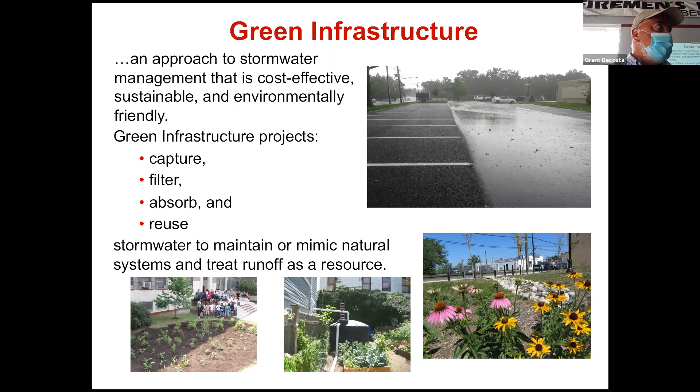So green infrastructure is what we're talking about today. It's really an approach for stormwater management where we're trying to mimic the natural water cycle. We're trying to capture stormwater near its source, infiltrate that water or absorb that water, and at times reuse the water. So we actually have some ways we capture the water and then reuse it in systems.

So this is the natural water cycle. We teach this in school throughout the country, usually in 3rd or 4th grade. We talk about how the snow melts from the mountaintops and comes down along the prairies where the buffalo roam, and water is recycled. You know, we can't create or destroy water. It's the same water that the kids are drinking now that the dinosaurs peed in millions of years ago. So the kids get a kick out of that.

But this isn't really our water cycle anymore, because we've added all these impervious surfaces. As we add more development, we get more stormwater runoff. A natural forested condition is about 10% runoff. Single family homes on half-acre lots give you about 20% runoff. More densely populated homes on quarter-acre lots give about 30% runoff. Downtown areas with buildings, like in Philadelphia or even smaller towns, give about 55% runoff. So as engineers, the idea is to make those 20, 30, and 55% runoffs look like 10% — we're trying to capture that water and put it back into the ground.

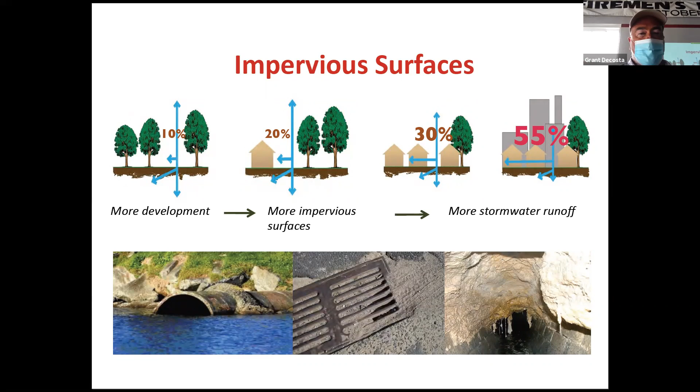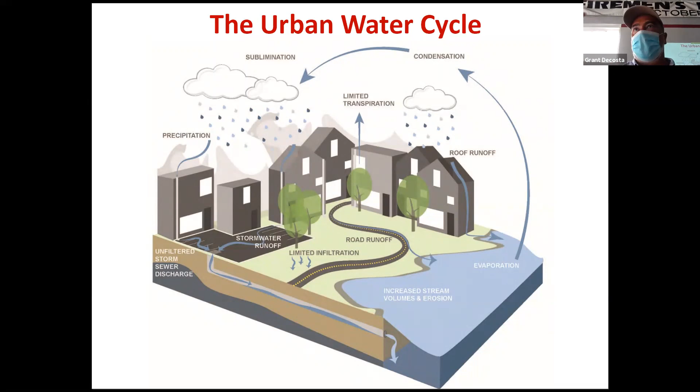So in effect, we've created this urban water cycle. There's much less infiltration, much more runoff. There's also less evapotranspiration — less evaporation and transpiration from trees and plants — because there are fewer trees and plants giving water back into the atmosphere. So we try to use green infrastructure to restore that water cycle.

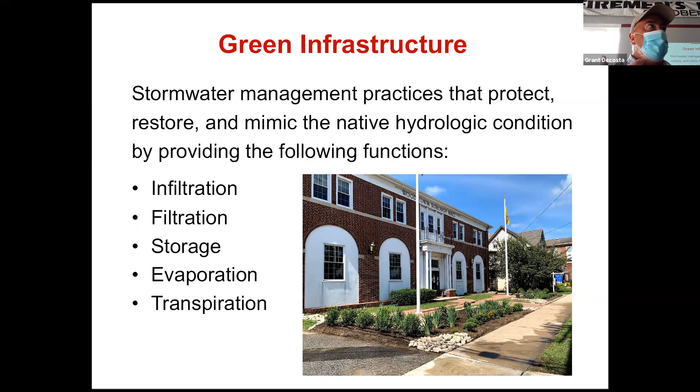All green infrastructure practices have some of these components — some have all of them, some only have a few. They infiltrate, they filter water, they store water, they enhance evaporation, and they enhance transpiration. That's what we're trying to do. These are the practices we're going to talk about today, and I'll talk a little later about how to design some of these practices.

So the first is a bioretention system. Bioretention is a long word, which we hate using because the public doesn't really understand it. Engineers and scientists love it, but when I go into a community and tell a mayor — who maybe is an accountant or a lawyer — that I want to put a bioretention system in front of his library, he looks at me like I'm crazy. But when I tell him, no, we're going to put a rain garden in front of your library, then they say, oh, that sounds nice. So there are different types of bioretention systems — the rain garden is one of them.

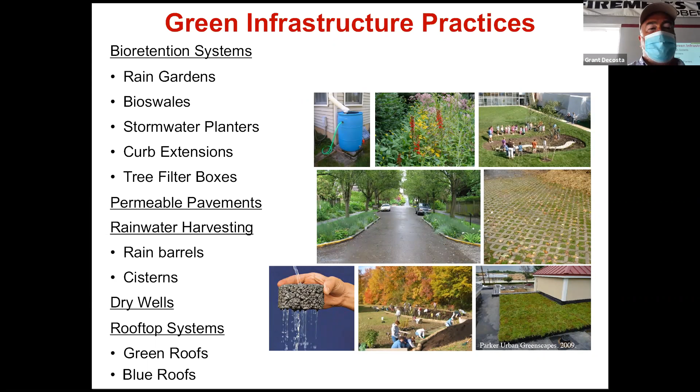Okay, so the rain garden is one of them. Bioswales is another, stormwater planters, curb extensions, tree filter boxes. We're also going to talk about permeable pavements, rainwater harvesting, dry wells, and rooftop systems.

So these are the types of bioretention systems. The bioretention cell or the rain garden is the one that we most think about. The other system is more of a swale, which is a nice word for ditch, as I tell everybody. So we call them bioswales - bio means life, so it's a ditch with plants in it, basically. It's designed to filter and infiltrate water.

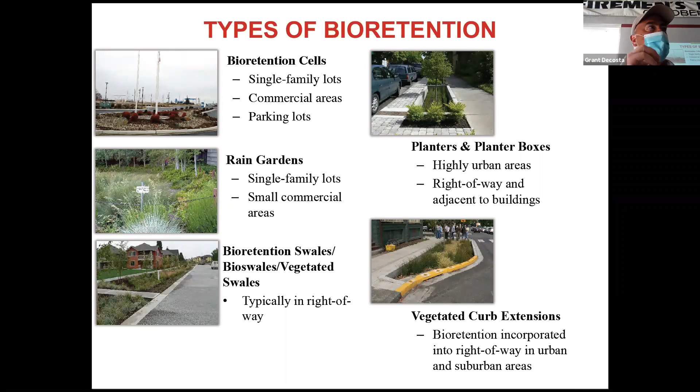We also have on the right-hand side of the slide stormwater planters and planter boxes, which are really built into the sidewalk area. They're very much structured systems, but they still behave like bioretention, capturing the water and letting it back into the ground. Then you have curb extensions, which is a little different because now we're extending the sidewalk out into the roadway. We're taking up a parking spot and harvesting rainwater there with a bioretention system.

What's nice about that is it also slows down traffic and can protect pedestrians when they're crossing the road. You see a lot of these near intersections where people aren't supposed to park anyway. The idea is these will allow drivers to see with an unobstructed view who's coming, so people won't get hit as they cross the road.

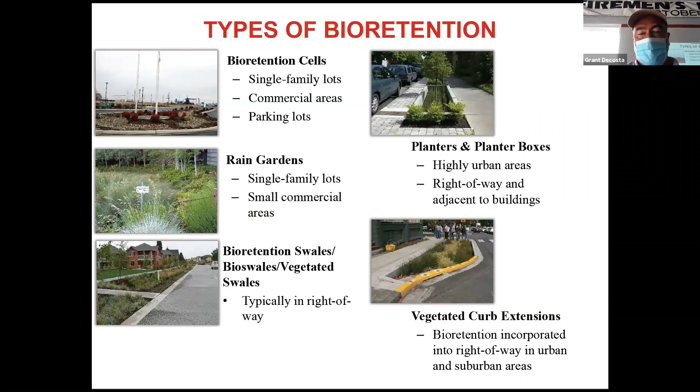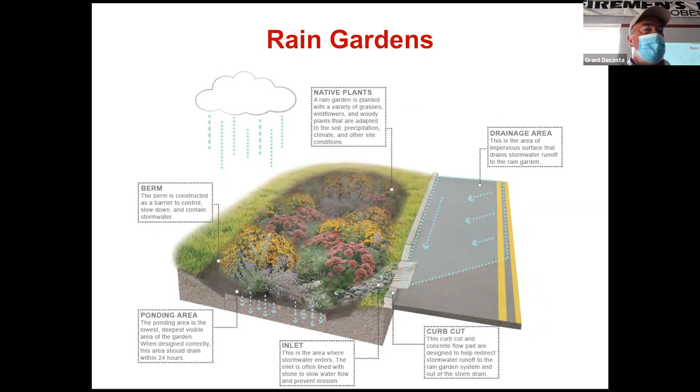So rain gardens are what we're really going to focus on today. This is an example of one - basically a shallow landscape depression. The idea is that stormwater goes into here, fills up uniformly like a bathtub, and slowly percolates into the ground. When you get excess water, it overflows into a direction that we identify, or it overflows into a system that takes it out under the garden.

So it's really nice. I'm not sure why it keeps doing that, but let's see - okay, there we go. If it goes out, just let me know in case I can't see behind me.

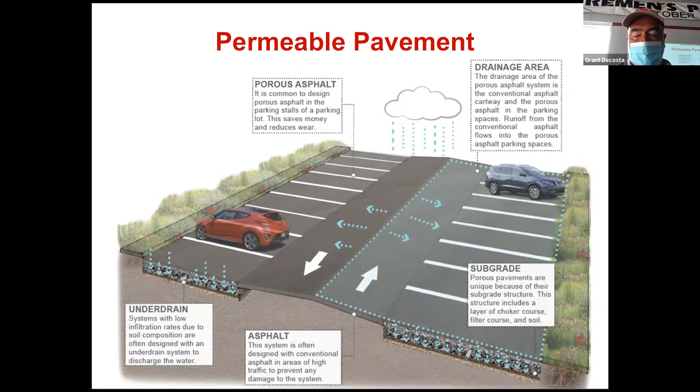So now we went back to the original idea. Let's go back to that coarse material, but instead of letting the water sit just underneath the asphalt, let's give it a place to go. We put a stone layer underneath, as you can see in this picture. The water goes into the stone and slowly percolates into the ground as it passes through the asphalt.

This asphalt is a little softer because it doesn't have the fine material, so we mostly just use it for parking spaces. When we do a parking lot or very low-traffic roads, you can drive trucks on it, but it's not recommended on a regular basis.

We have a couple different types of permeable pavement. There's porous asphalt, shown here—you can see the cartway where cars drive is regular asphalt, which is wet, and the parking spots are porous, which stays dry. The cartway water flows onto the parking spots, goes into the stone, and seeps into the ground underneath. It's a great system for storing stormwater.

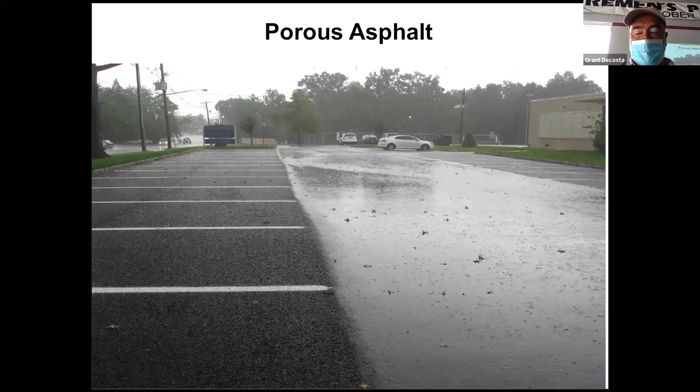We also have pervious concrete—same concept, no fine material, so water passes right through. And we have permeable pavers, which are really nice; water passes between the cracks, same stone layer underneath, but these are very expensive. That's the problem with pavers.

If you're changing out a concrete sidewalk for pavers, it's going to cost a lot of money. Porous asphalt costs exactly the same as regular asphalt, about $2 to $4 a square foot. The added expense comes from digging down and putting that stone layer underneath—that's what costs the extra money.

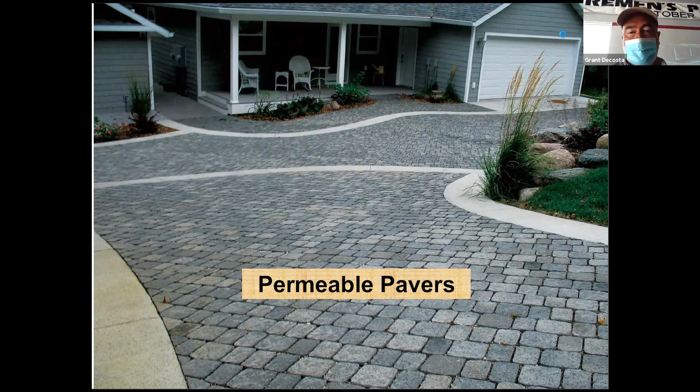We also have grass pavers, which we use a lot in overflow parking. Grass grows up through these concrete blocks, with a stone layer underneath, and water goes right through into the ground. The other thing we do with green infrastructure is harvest rainwater.

We happen to be here at a firehouse, and I know firehouses spend a lot of time washing their fire trucks using potable water to do that. We talk a lot with firehouses about putting a tank in so we can harvest rainwater and use that to wash the fire trucks. Rainwater actually has a different hardness, so it doesn't spot up as much, so you get a nicer wash on your truck.

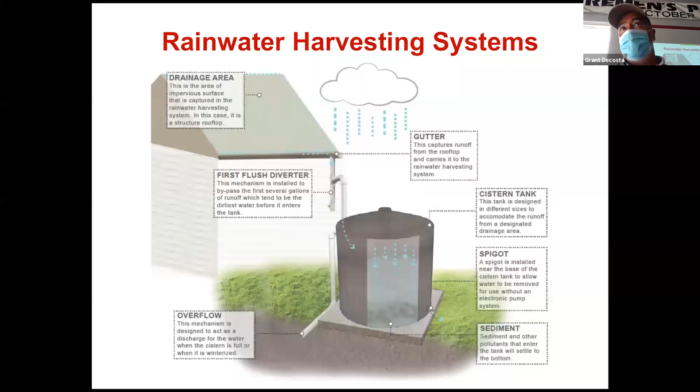So the idea is we're harvesting rainwater. We have lots of different systems, and individual homeowners put these barrels in. Now, these barrels don't do much for stormwater management, they only capture the first 55 gallons of water, so you're really not going to solve any flooding problems with this, but you are going to build some environmental stewardship.

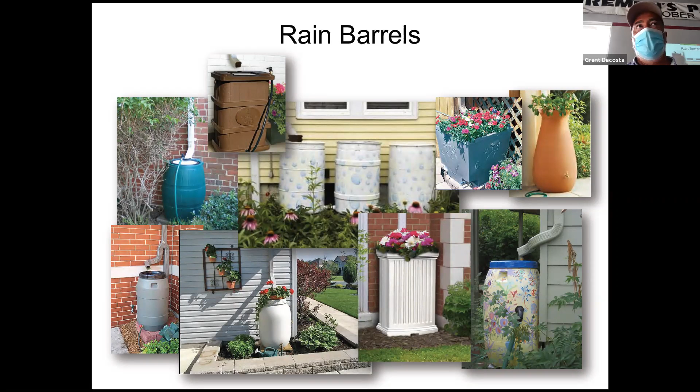This is a great way to get homeowners excited about doing something to save the planet. First, we convince them to put a rain barrel in. Next, we convince them to put a rain garden in. Next thing you know, they're trying to put a green roof on their house. So we refer to the rain barrel as the gateway drug to stormwater management. That's what we use it for, as an educational tool. But these systems are actually very effective.

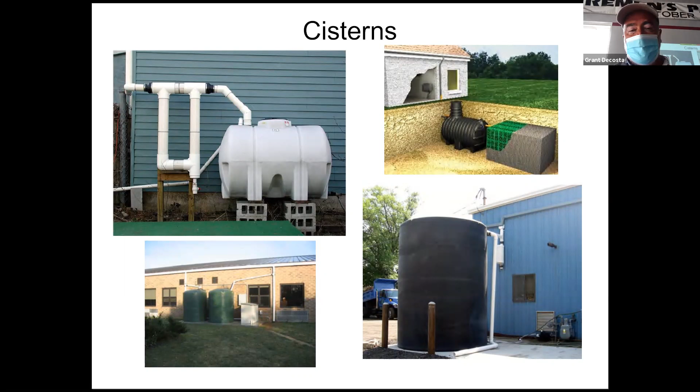Here's one we had built at a community garden. What's nice when you build these at community gardens on vacant lots is when they sell the vacant lot, you can just go and pick up the cistern and take it to another lot. It's easy, they're plastic, they're transportable, they're not a big deal.

This is one that slips right against the wall, which is nice because it's only about 21 inches wide. So you can still have walking along the sidewalk and still put this against the wall. This will hold about 530 gallons of water.

These are some that we had built at a community college. What I like about this is they have internal downspouts, so we're able to tap into that and actually bring one into these cisterns to take some stormwater from the rooftop.

The other thing we see a lot of are these dry wells. What's nice about a dry well is it's kind of underground, out of sight. What's also bad about a dry well is it's underground and out of sight, so you can't see if it's not working. You can see if a rain garden's not working, has problems, has too much water in it, not draining properly. This is basically a plastic container underground with stone around it, fills with water, and slowly infiltrates into the ground.

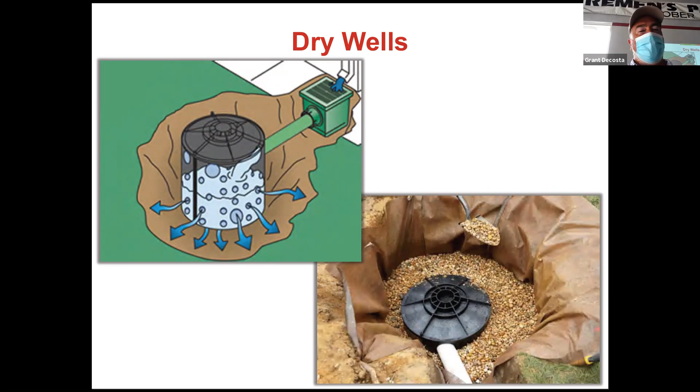The other thing we look at are these rooftop practices. There's two types we think about: green roofs and blue roofs. I'm sure you've seen a presentation of Philadelphia talking about their green infrastructure program. They always show all the roofs in Philadelphia, and they click a button and they all turn into these beautiful green roofs, and everybody in the audience goes ooh, ah, like they're watching fireworks. And all the engineers in the audience say, wait a minute, that's got to be heavy. You can't put a green roof on an existing building without shoring up the structure, and they would be right.

In most cases, a green roof weighs between 15 to 35 pounds per square foot. Most roofs can handle that extra weight because it's designed to handle snow load. But if you put a green roof on a building and get 3 feet of snow, there's a good chance the green roof and the snow will be in your lap. So you have to be very careful and make sure the structure can actually hold up that roof. This is great for new construction, and we highly recommend it.

What's nice about a green roof is it provides an extra layer of insulation, so it helps with heating and cooling bills. It also lasts a long time. The typical flat roof has a rubber membrane that we tar over, and every 5 to 7 years we have to redo it because it starts to crack and leak. A green roof will last 25 to 30 years without any additional work—you just have to take care of the plants.

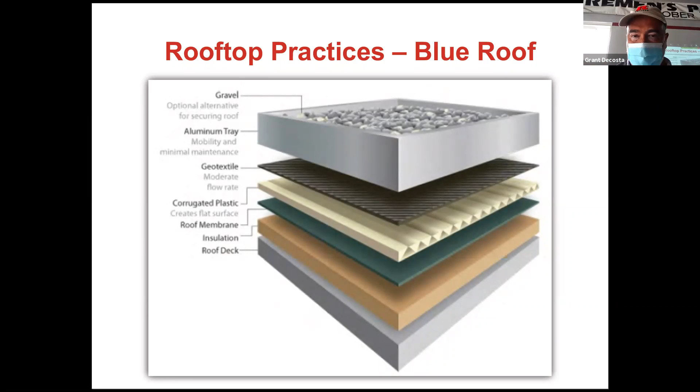So next is... there we go. Grant, you're up. Do I take questions now or later? How does this work? Any questions? Excellent. Good, thank you. No? Good. Yes, sir.

So the cistern—the typical cost is about $2 a gallon, installed. The problem is you also have to pour a concrete pad to put it on because it's a lot of weight, or have a really strong stone base. And if you want a pumping system, you have to redo the gutters. It could be as much as $3 or $4 a gallon when you add all the other things on. They're very inexpensive, but they only work 9 months a year, because you have to drain them in winter or they become a big ice cube. And that's bad.

Yeah, that was Clark, New Jersey. Yeah, so, yes. Yeah.

With both blue roofs and green roofs, you're only storing about a half inch of water typically, because water is very heavy. So you don't get a lot of storage. In a green roof, we say we're going to store a half inch of water in the soil. Blue roof, we may get a bit more since we don't have soil weight, so maybe up to 1 inch. But when I build a rain garden to handle stormwater, I can design it to handle 3 to 4 inches of rain. So it's all about how much water you're trying to manage.

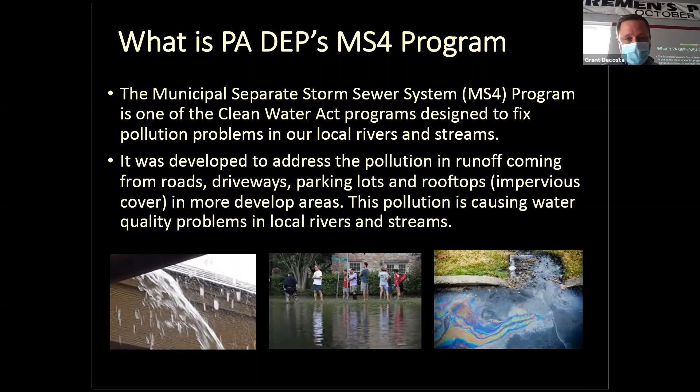The MS4 program in Pennsylvania is managed by the Pennsylvania Department of Environmental Protection. It's a component of the Clean Water Act. Really the first phase of the Clean Water Act was to address those point sources - that's the end of the pipe. So these are things that are in the built environment. There are other types of non-point source pollution, such as what we see off of agricultural operations, but this is to handle that urban load that's coming when it rains off of our built environment.

As I mentioned, the Clean Water Act was really effective in addressing all of these point source problems in our built environment that's coming out. There's still more to be done, such as addressing combined sewer overflows, which are still happening in a lot of our large cities, but that's another problem, fortunately, we do not have in this watershed.

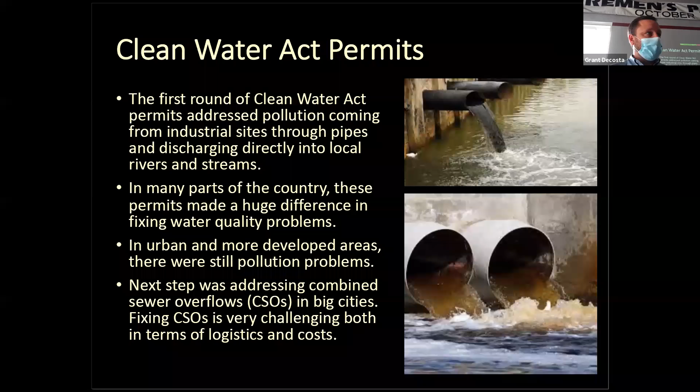So the MS4 program, as DEP monitors it, is a permitted program. Every 5 years, municipalities that have a certain urbanized area or density have to get these permits. We just had our permit cycle come up, the new session started in 2017. The next one will actually be in 2023. Right now the DEP is working on updating that, and there are changes to the program during each permit cycle.

Where are these MS4 communities in Pennsylvania? All the colored places are where you see them, with obviously the largest areas around our more dense population centers in Pennsylvania.

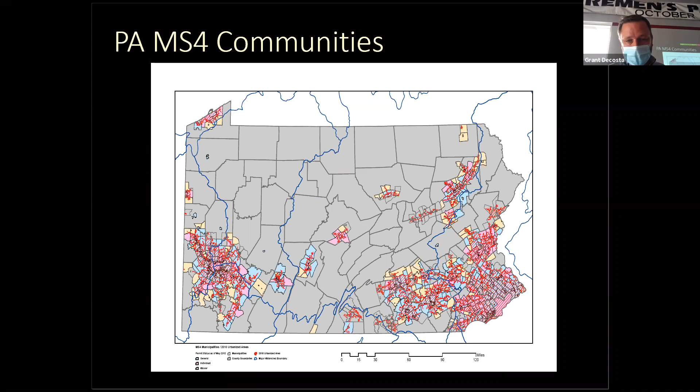So what is included in an MS4 permit? Really there are 6 minimum control measures that all permittees must meet: public education and outreach on stormwater impacts, and public involvement and participation. A lot of the benefits that members of the CWMP get are through programs like this, and the different members do stuff like stream cleanups that can certainly count and help for you.

We also have our annual advertising that goes out, and all the members pay in. BRC, Brian Winslow, manages that program, and that counts for your annual reporting, which is due this time of year.

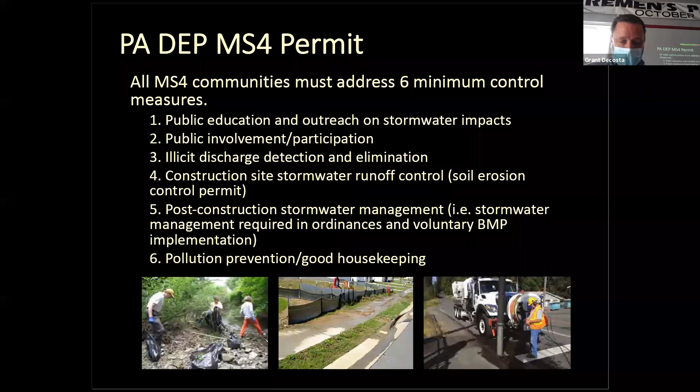Illicit discharge detection and elimination, that's what a lot of the public works crew, many of you in the room, do as part of your permit and reporting. Construction site stormwater runoff controls, post-construction stormwater management, those are typically when things are happening that are disturbing. And then finally, pollution prevention and good housekeeping. It really is the paperwork side of things.

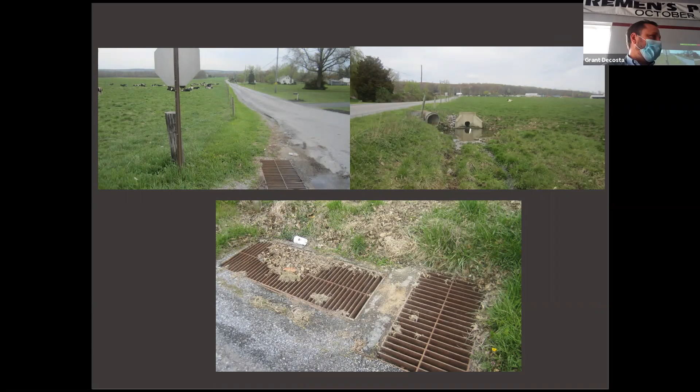But this is another view of the farm. You see the drop boxes here, which directly discharge to the pipes you see on outlets in the upper right. This farmer had 9 of these along his roadway. In addition to his own impairments, allowing us to put in that buffer is helping address the urban impact as well—otherwise, if you went out and just sampled his stream without knowing this, you would think all of those pollutants are coming off his operation. So how can we help?

This is the collective we here—CWMP, the members here today presenting to you. First is funding, money. A lot of us are 501c3 nonprofit or other types of non-governmental organizations. We can apply for funding that municipalities may not be able to, and we can help install those. Sometimes it's in-kind with technical assistance, sometimes it's direct payments. We do have some of these programs going on now where we're helping municipalities fund their MS4 program and the BMPs that need to be installed.

Technical assistance, as we're hearing about today from groups like Christopher Obropta and Rutgers Cooperative Extension, can help both with design and implementation. We can also help with some of the behind-the-scenes stuff with getting your permit approved. And finally, project implementation—once again, that's the built stuff we're looking at.

We're fortunate here that on the money side, the William Penn Foundation out of Philadelphia has launched a Delaware River Watershed Initiative. This is a 10-year program to achieve measurable water quality results over that period. One of the cluster areas they've identified within the Delaware River Watershed is the Brandywine Christina. This gives my group and others a lot of funding to help support staff time. They're also making capital funding investments in groups like the National Fish and Wildlife Foundation, one of those financial sources we can apply to for funding to help you all meet your project needs.

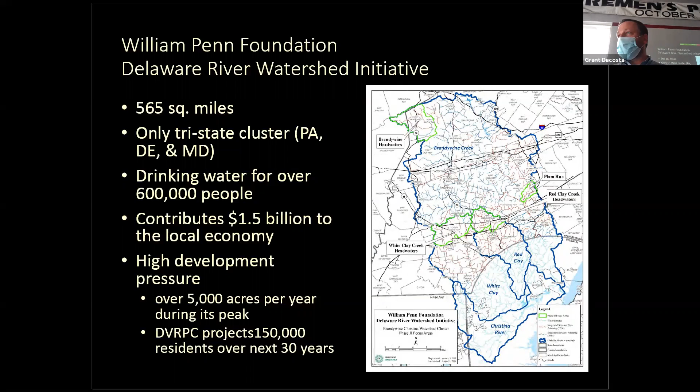Why is that important here? As we know, Chester County is blessed with a lot of great resources, but it's in a highly developing area. Recently the Delaware Valley Regional Planning Commission estimated we're going to have 150,000 new people in Chester County over the next 30 years—that's 50,000 people per decade. So we're anticipating more urbanized area, more stormwater runoff, and a larger responsibility for municipalities to meet their MS4 requirements.

Another way we can help with funding: Shane Morgan with the White Clay Wild and Scenic has the Catch the Rain program. As we apply for funding, this is another source that both municipalities and, more importantly, landowners can apply to. Landowners can potentially be part of your MS4 solution.

Technical assistance is another way we help, including on intergovernmental agreements. This is some of the behind-the-scenes work for implementing your MS4 program. Recently, through the CWMP, we helped Honeybrook Borough and Honeybrook Township develop a joint MS4, allowing them to partner together to meet stormwater needs in a cost-effective manner. To get this approved by DEP, some important behind-the-scenes components need to happen, one of which is an intergovernmental agreement. Part of that had to identify how projects would be proposed, managed, and funded. What made sense for them was a cost share program where the borough covers the majority of the investment need.

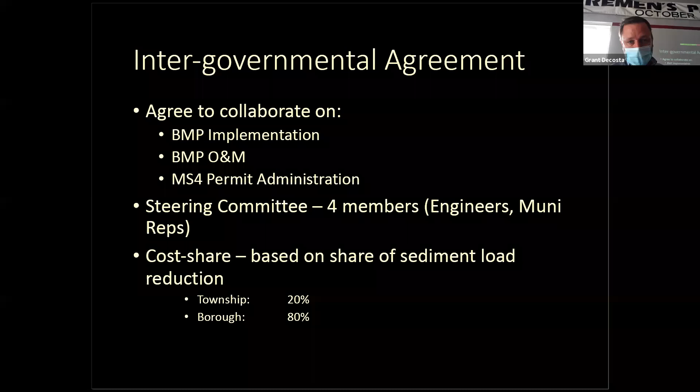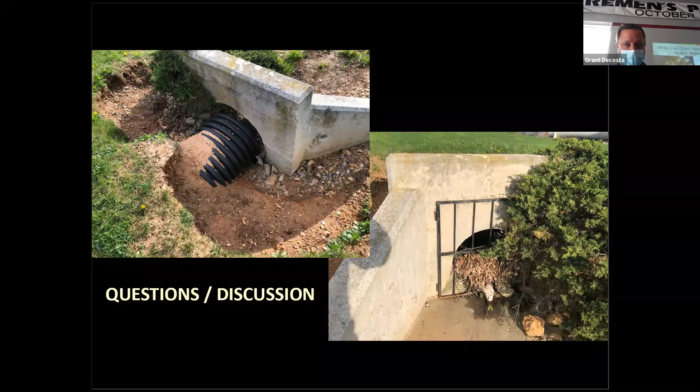Are there any questions now from the audience or via the chat? Nope. Thank you. Now we'll turn it over to Shane.

Good morning, everyone. I'm Shane Morgan with the White Clay Watershed Association, and I'm going to talk a little bit more about the West Grove project and how we came about selecting it.

But first, I wanted to give a little background on the White Clay Wild and Scenic River, for those of you with townships here. I'm trying to get this on our screen—we're having some technical difficulty for those viewing at home.

Bear with me. I'm wiggling it. All right, let's see—source not supported. I don't even want to touch this. I'm going to use the mouse, we'll see if that works better. Oh, I didn't even touch it, so that wasn't even me. All right, maybe I'll just hold it. Oh, that didn't... This is what happens when I have to turn off and speak. I can advance on there, it's just not showing up here. Okay, maybe it'll...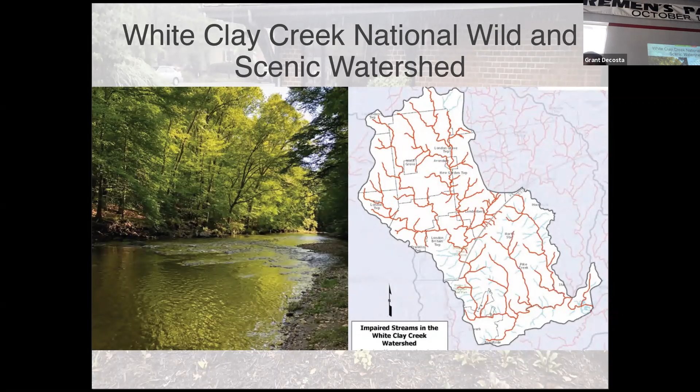That being said, we do have impairments, and a lot of them are caused by stormwater or non-point source pollution that doesn't come directly out of a pipe and can't be managed. These photos are all taken within the White Clay.

So this is the watershed again. We're a bi-state watershed, Delaware and Pennsylvania. We're 30% ag, all that brown is ag land. We're 30% wooded, or a third, I should say, and about a third developed, so the yellow and red is developed. So we have multiple land uses here. But the map on the right shows the urbanized area, which is what you guys are all concerned about, and that's where you have to manage your stormwater. So that's more of the built area. You can see it kind of eliminates the farmland up top, and it also eliminates the bi-state preserve in the middle where we have most of our forests.

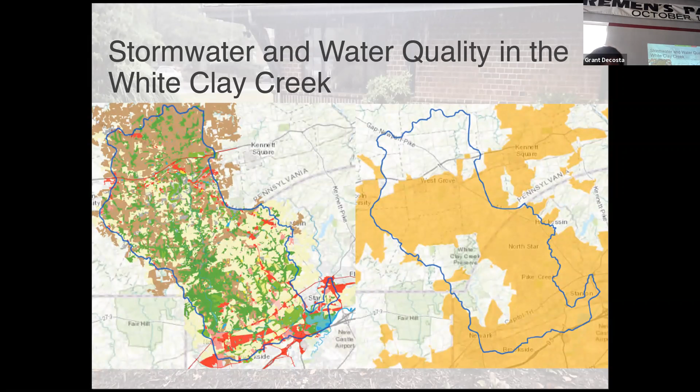I love talking about this because when you look at the watershed as a whole, most of the land, 88%, is privately owned. But a lot of times we try to address projects on public land because it's easier, because we own it. We don't have to get private landowners to buy in.

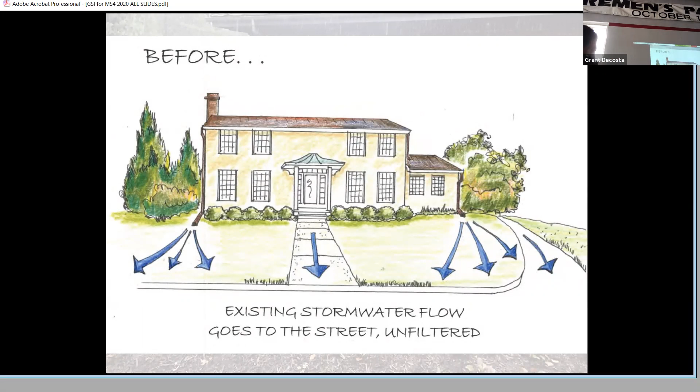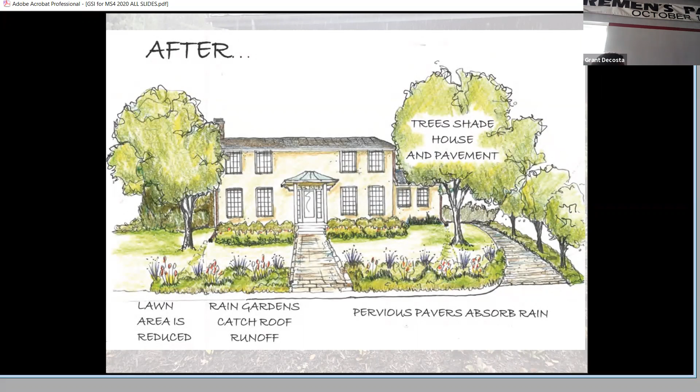Okay, sorry about that. So this is a before picture of a typical suburban house with no really green stormwater infrastructure practices installed. And this is kind of what we're trying to promote. It not only helps you absorb and infiltrate water and provide wildlife habitat, the landscaping also beautifies your house.

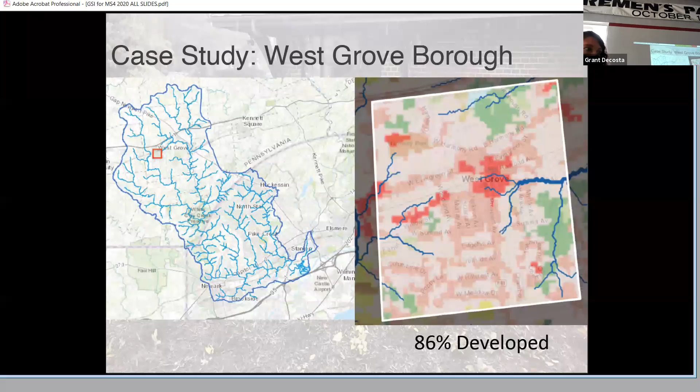I can't win today, right? So really the goals were to look throughout the entire borough and look for GSI area opportunities, like places where we could put or install things that would help with stormwater. And then to select one of those as a demonstration site. And then also to provide West Grove with the opportunity to use this in their stormwater permit plan. So those were the goals.

We put the team together. Most of us are here today. Obviously, Chris and Holly from Rutgers and a whole crew of people from Rutgers that came out and did different parts of the project. Myself and Greg McCummings, the borough manager, sitting right over there, for West Grove. We had to have their willingness to do this and work with us on it, and he was very, very willing to pursue this. And then we wanted to include some other more regional entities, Brandywine Conservancy and Chester County Conservation District, so they could go through the process with us so that maybe we could keep replicating it elsewhere. Project timeline.

We started talking about this in 2018. We had our first planning meeting in November of 2018. Then we kept having planning meetings and eventually submitted some grant applications, and one of them came through. It was from the Dockstetter Foundation, a local granting agency associated with SECCRA, the landfill over in London Grove Township. They awarded this process.

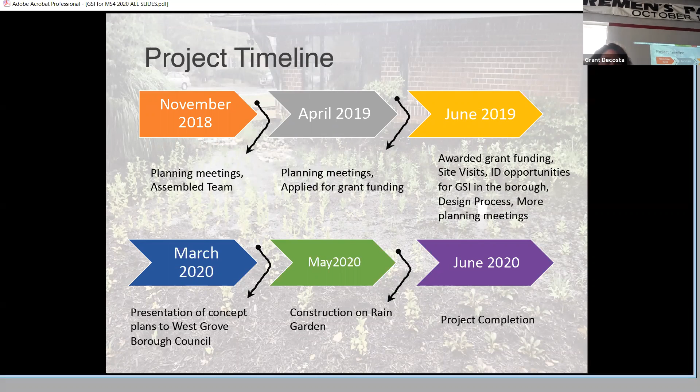Some of the outputs. There were a lot of outputs. The plans are pretty amazing. This is the borough right here, that square on the left. We have a green infrastructure feasibility study. I think 15 to 16 projects or locations were identified where we could do things. Specifications on those projects were included in this report.

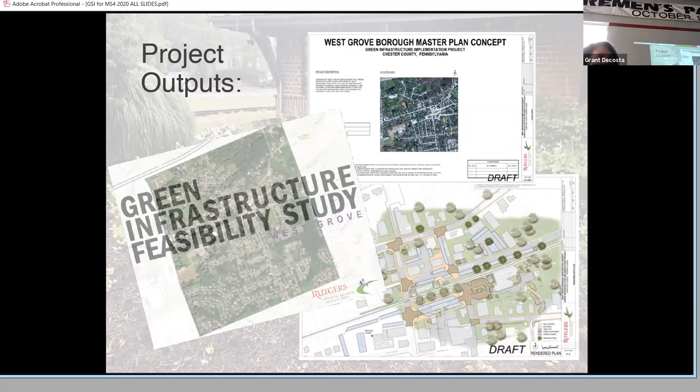And then we also, because we were so excited about West Grove, who wouldn't be, we put together a town square plan. So if they wanted to focus in the area where most of the people, residents, visitors and businesses are, we could have a whole focus area down there on green infrastructure, and it could be used for interpretive purposes as well.

Other outputs were engineered drawings. This is important for your MS4 permit. If you're going to include things like this, you need to have an engineer sign off on them.

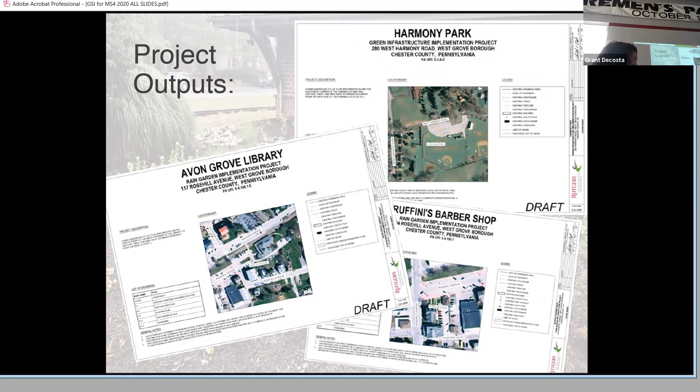So we actually have 3 potential projects, even though we selected Avon Grove Library. Harmony Park, which is municipal land and makes it easier to do work on, was one that was selected, as well as a commercial property in the town square where we would have to get landowner approval to do something. But we have those plans, they're shovel ready. We can go to another funder and seek funds to implement these should we get the go to move forward. So it's good to have that in our back pocket.

We got a lot more than we bargained for, I think. And then the main project we're going to talk about today is the rain garden itself. That was the output, and that's part of what we used the grant funding for as well.

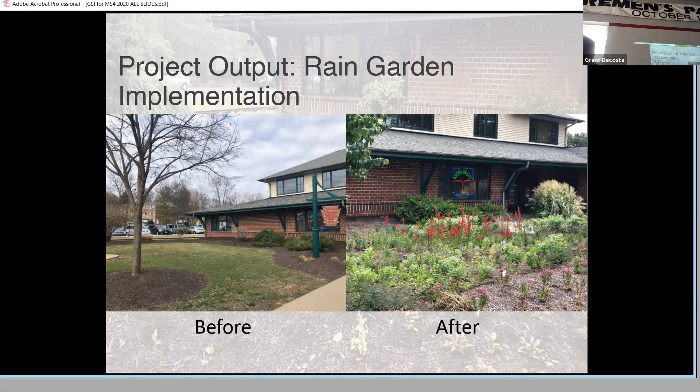This is a before and after picture. You'll see the after today when we go over there. I'm just going to quickly walk through it because all I did was document what was going on and help with the planting. Chris will talk about more of the construction work, but it started May 18th.

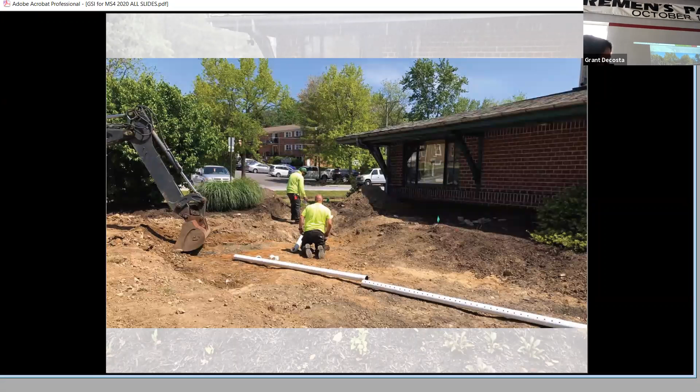These are some of West Grove Public Works staff. One of the ways we cut costs was having them do the construction and use their equipment. Holly was there, as well as Chris most days, telling them what to do, how to do it, what to look for, just really getting them comfortable with this process.

So that's it, that's the drain, not set up yet, obviously. And here it is after the drain was set up. It's called an atrium drain. Basically, when that fills up, the water will go into that perforated pipe and then head out to the storm sewer system. Originally, both downspouts to that roof were going directly to that storm sewer system.

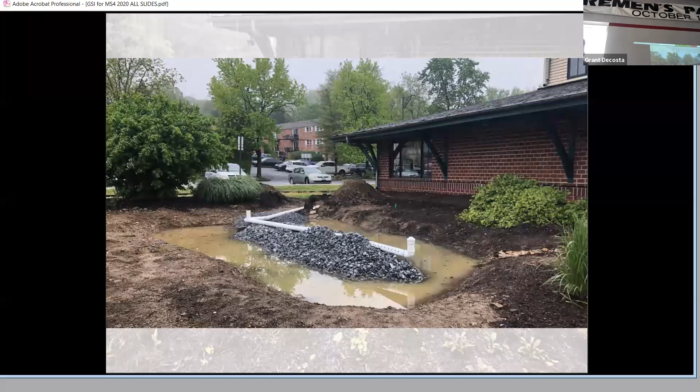So an overview of the costs. The total project overall was about $13,000, but $10,500 of that was all of the engineering, design, planning, all that goes into making plans, as well as overseeing the construction for pretty much a 2-week period, not every day, but on and off as we could get out into the field.

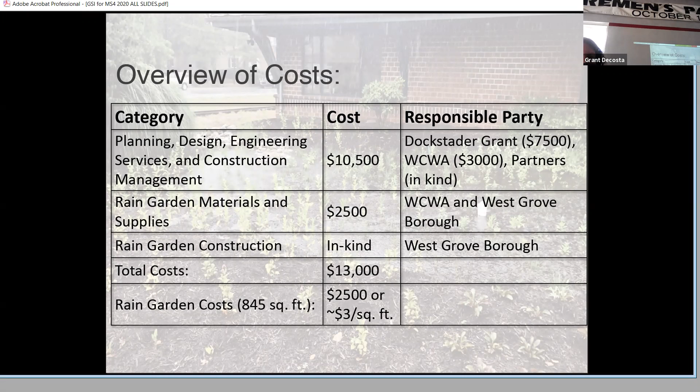So can small projects make a difference? This is why I always became interested in rain gardens. I read about a study years ago in Minnesota where they took 2 streets in a neighborhood that were draining. They were 2 separate drainages, okay? One was a control, one was a treatment, where they put 17 rain gardens in using curb cuts like what Chris talked about. So they were taking the runoff coming down the driveways off the properties to the road and putting it back into the ground by collecting it off the roadways.

These were more expensive because, well, first of all, it's 20 years ago, so they would probably be more than $12.50 per square foot today. But they hired a landscape designer, engineering design build firm to do all of these rain gardens so that they would be more uniform. And they were on a slope, so it needed retaining walls and things like that.

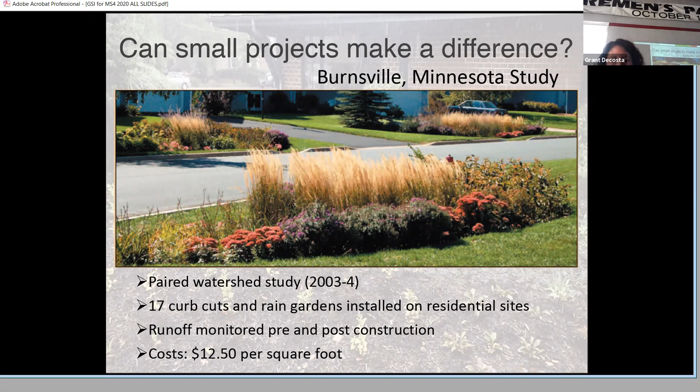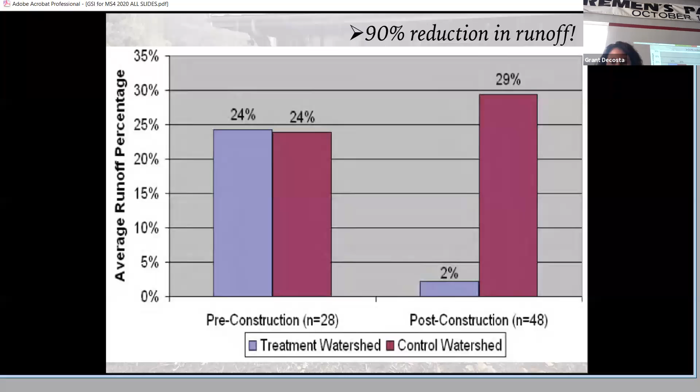Does it work? Well, here are the results from that study. They took average runoff percentages before construction from both those watersheds, the test and the control, and then they did it again post-construction. And as you can see, the one with the 17 rain gardens reduced 90% of the runoff going down, and there's a lake at the bottom. So they were really trying to protect that lake. So yeah, they can make a difference.

And I'm probably a big cheerleader for them. So that's all I have, and then I'll talk more when we actually go to the rain garden about the plants and the maintenance and things like that. So I'm gonna bring Chris back up unless anyone has immediate questions about any of that. And you can ask me afterwards. Oh, Andrew.

Pretty good return? Is that a good thing? Is that something that we can model? It seems really like... Sure.

So out of the total cost of that garden, 75% was grant funded. So we applied for the grant, we got it. The rest of it came from the Watershed Association and the Borough. So they paid for all of the bioretention soil, mulch and the rocks, the piping, all the materials besides the plants. We paid for the plants. And they also had a lot of in-kind services, and I think that's where we really made the savings, in-kind services that the Public Works Department put in.

And I will say this, the library is right there, even though this was a Borough project and Borough Hall's right there, the library is right there viewing it. And they put a post on Facebook that made me so happy. They posted the rain garden. They talked about how much they enjoyed watching it and how it functioned. And I'm thinking, great, they have a pretty big audience, right? People that are following them. And so they're actually using it to educate some of their patrons, which is again, one of the reasons why we chose that site.

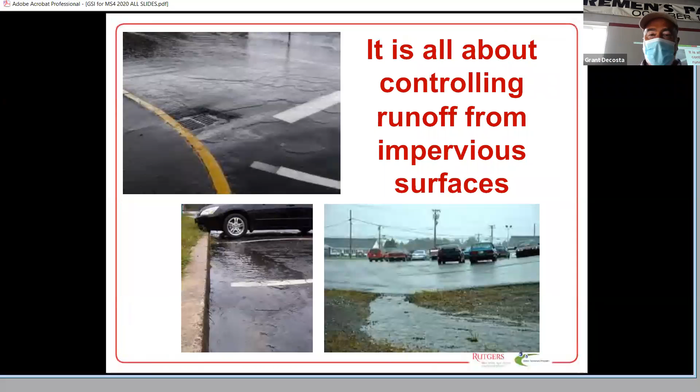I'm gonna talk about design. So this is gonna be planning, design, and construction in 20 minutes. Hopefully it'll be good for you guys.

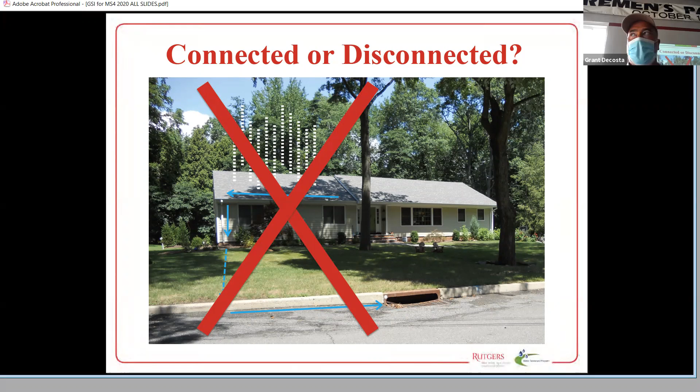So it's all about managing impervious surfaces, first of all. We're trying to disconnect those impervious surfaces that are directly connected to the stream. So that rooftop that's being piped to the road or piped to the catch basin is going right into the inlet, right into the stream. We're trying to disconnect that and capture that water at the source.

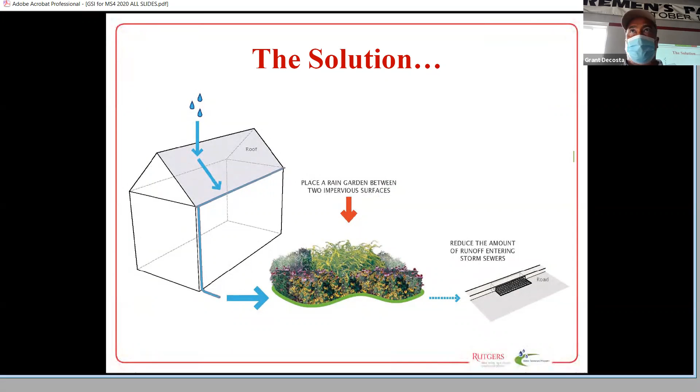We're using rain gardens to do that in this case. The rain gardens we design are typically designed for the 2-year storm, which is about 3.3 or 3.5 inches of rain over 24 hours, depending where you are. So that's what we're looking to try to capture here.

Different parts of the rain garden. Like I said, the rain garden is a shallow landscape depression. It's usually designed to hold between 3 to 12 inches of water. So after the rainstorm, it could fill up with 12 inches of water. Within 24 hours, it's typically drained down into the soil, so there is no possibility for mosquito breeding. That takes about 72 hours.

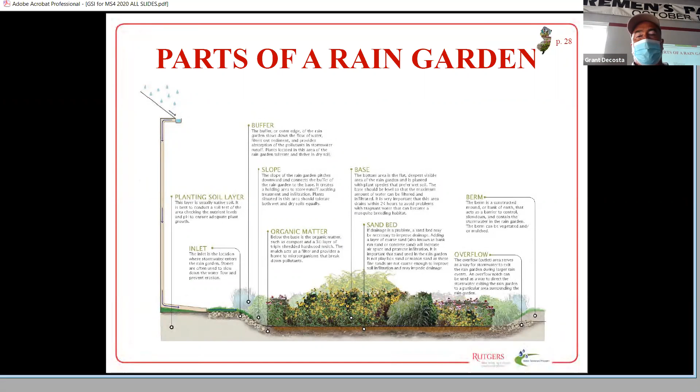The bottom of the rain garden is flat, so it fills up uniformly as it's filling. Water doesn't really flow through it, it just fills and overflows at a location that you designate. And we always armor the overflow with stones so we don't cause any erosion. This is kind of what we're talking about.

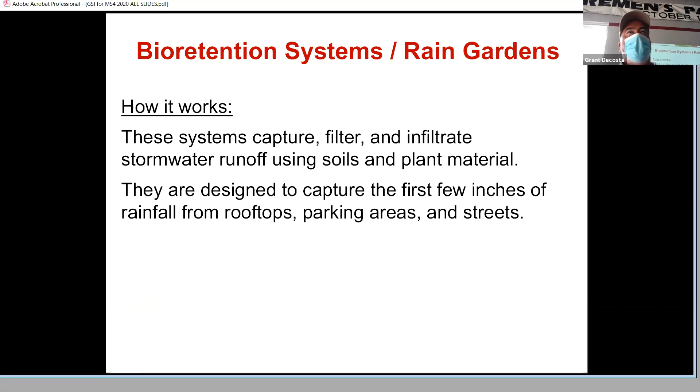We're trying to focus on capturing water from rooftops, parking lots, streets, any place where the water is going directly to the street or into the catch basin or into the stream, okay?

What's nice about the rain garden or bioretention systems, they really mimic natural conditions. It's really trying to mimic what happens in a forest, where you get infiltration, you get evapotranspiration, and the roots of the plants open up the soil and get more water back into the ground.

You get sedimentation, so anything that comes in with that sediment settles out. The plants filter out the pollution, the plants uptake nutrients, right? We fertilize our lawn with phosphorus and nitrogen. When that gets into the rain garden, the plants use that, so it doesn't wind up in our streams, right?

We also have microbial activity. There's a layer of mulch in there and there's soil. So as the water is passing through the mulch and the soil, there's microbial activity to kind of break down some of those pollutants also. And it has a strong aesthetic value.

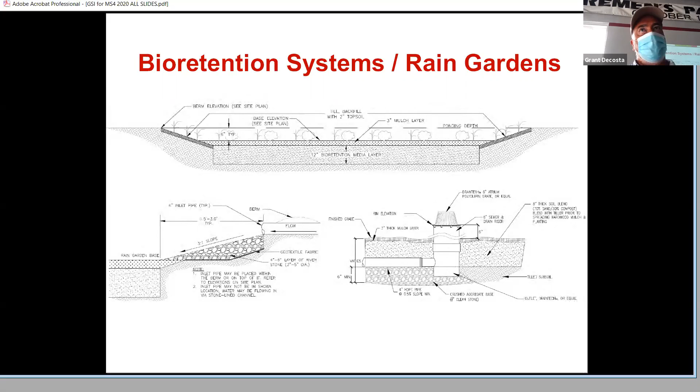This is a typical engineering cross-section of this. I'm sure you can see that, but in this case, we're showing 12 inches of bioretention soil mix that gets in. We're excavating down 9 inches and then an additional 12 inches. We fill in 12 inches with really good soil. The bioretention mix is about 70% sand and about 30% compost material. We add 3 inches of mulch and then we have 6 inches of ponding on top of that. So we're digging down about 21 inches, okay?

Like I said, most rain gardens are designed to capture the first inch and a quarter of rain. You'll see all the ones down in Philadelphia, as part of their green infrastructure program that addresses the combined sewer overflows—they design everything to capture an inch of rain. Here, we're trying to do more. We're trying to capture about 3 to 4 inches of rain, because we also want to address flooding issues, right?

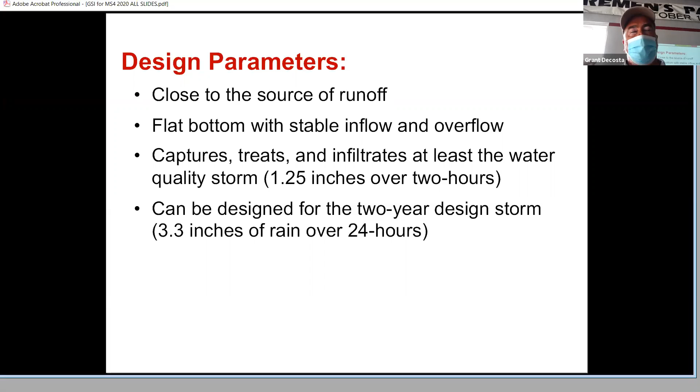Infiltration is very important. So there's 2 factors with the rain garden: how do we design it? It's the drainage area—how much area is drained to it—and how fast does the soil infiltrate, okay? So we measure infiltration rates. If the infiltration rate is less than a half inch per hour, it's really not a good spot for a rain garden, or you'll have to go in and amend the soil and put an underdrain system in, okay? If the infiltration rate is greater than 10 inches per hour,

You may have to add some other material to the rain garden to slow the water down, because the water's passing through it too quickly and it's not getting treated. We amend it with coarse sand and compost—you have to use coarse sand. If you use the sand from a sandbox, it doesn't let water pass through; it becomes basically cement. It has to be a coarse, angular sand.

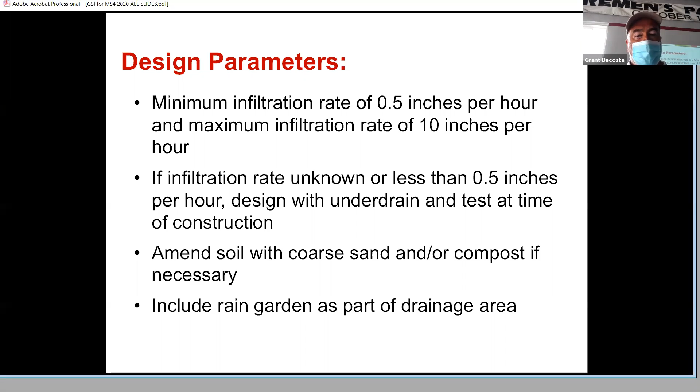This is a design problem we typically show people: a driveway of a house. The driveway is 50 feet long, 15 feet wide at the end, with an extra piece in front of the garage, so it's about 1,000 square feet of driveway. I also figured in the corner of the roof of the building.

I thought maybe we could put that into the rain garden. The rain garden would go at the very end of the driveway toward the backyard. This driveway actually drains toward the backyard into a drainage ditch, which goes out to the stream, so it's directly connected to the stream.

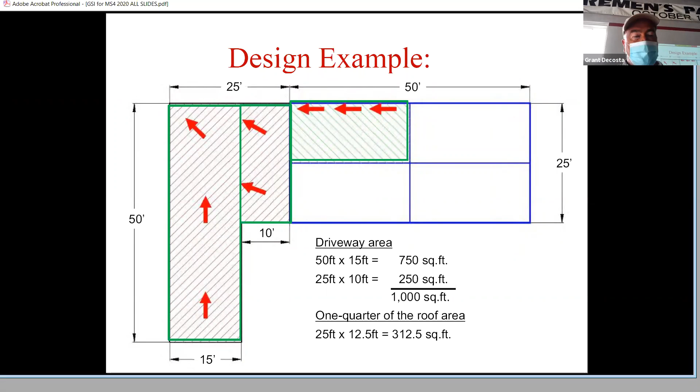So we do some quick calculations and figure out the rain garden should be about 250 square feet in size. Now we go back and include the drainage area of the rain garden itself as part of our total drainage area. Our drainage area was 1,000 square feet from the driveway, and now we're building a 250 square foot rain garden.

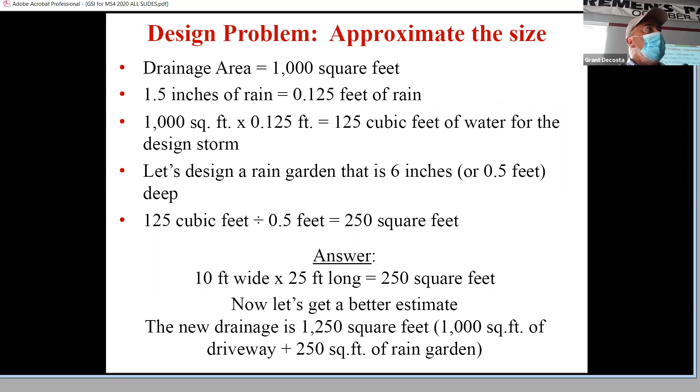Any water that lands in the rain garden also has to be treated by the rain garden, so we have to include that and make sure the rain garden is big enough to hold it. We redo these calculations and the rain garden becomes a bit bigger—about 300 square feet in this case.

We often use a program—Rutgers uses HydroCAD—because Rutgers is very frugal with money, unless it's regarding our football team. HydroCAD is a very inexpensive model we're able to buy for our students. You can go to hydrocad.net and download a free version that works for about an hour. My students do this all the time: at the end of 59 minutes, you save it, close it, open another free version, and keep going. It's a very inexpensive program.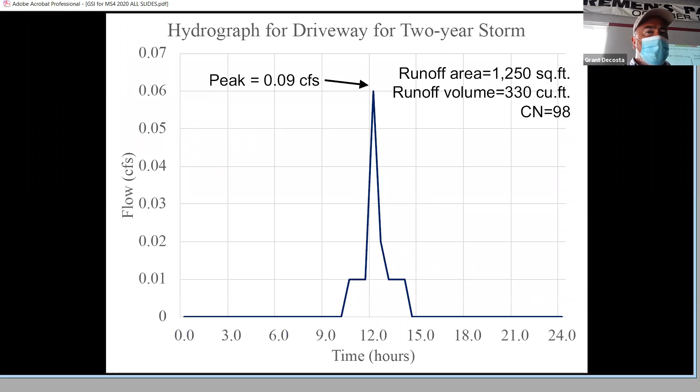It actually has some very cool features. You can put in your drainage area and have it calculate the runoff, showing how much water is running off that area. Then you can put your rain garden in and design it—we do this both ways.

In this first graph, we're designing the rain garden to handle 1.25 inches of rain over 2 hours, and we see the peak elevation gets to 100.28. When we do our designs, we set the bottom of the rain garden at an arbitrary elevation of 100 feet above sea level, then run it through the model, which says it'll fill up with 0.28 feet of water for that storm—meaning my rain garden needs to be about 4 inches deep.

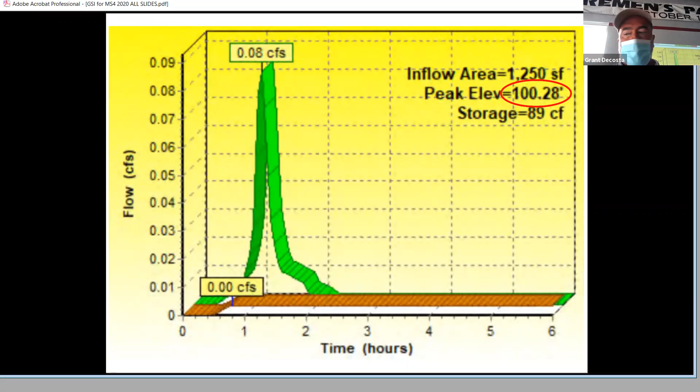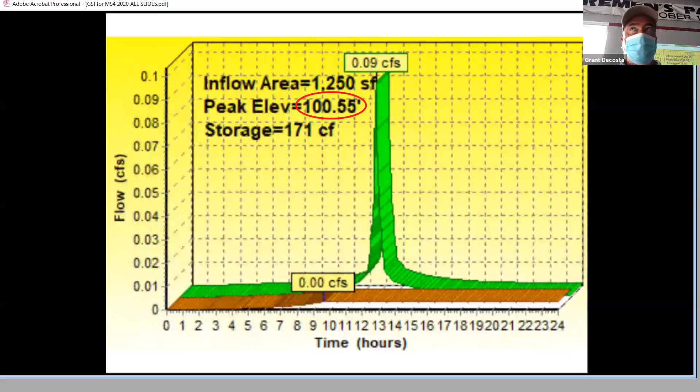Then we run it for the 2-year storm and see it fills up with 0.55 feet of water, so my rain garden needs to be about 7 inches deep to handle the 2-year storm. That's kind of how we design this, and then we go out and actually build it.

A big question that always gets asked is: is this going to matter? That question already came up—well, how do we get credit for this? It's one rain garden, is it really going to make a difference? There's an old Chinese proverb: the mighty waterfall begins with one drop of water. So our thought process is, if we put enough of these in, they actually matter.

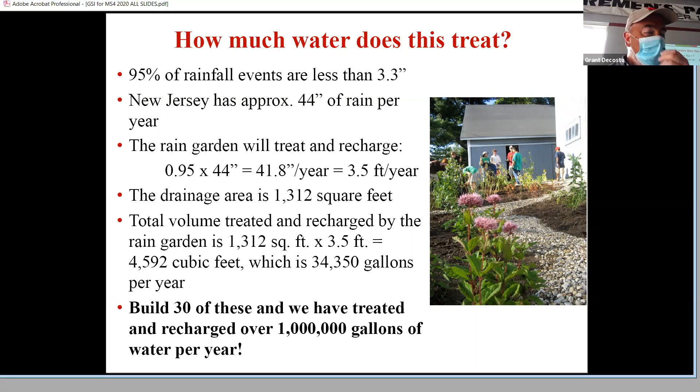One rain garden treating my 1,312 square foot driveway is going to capture, treat, and infiltrate about 34,350 gallons of water per year. If I can get 30 of my neighbors to build them, we're over 1 million gallons of stormwater a year. That's the power of this—we need many, many people doing this, and we can actually make a difference. So this is the example here at the library.

We did a full-blown green infrastructure feasibility study for the town, a master plan, 3 engineering designs, and we oversaw the construction. Well, Holly helped with construction too, she likes digging. So for what was it, like $10,500? So yeah, this is why we're in Pennsylvania, because we're cheap, and they grabbed us over here quickly.

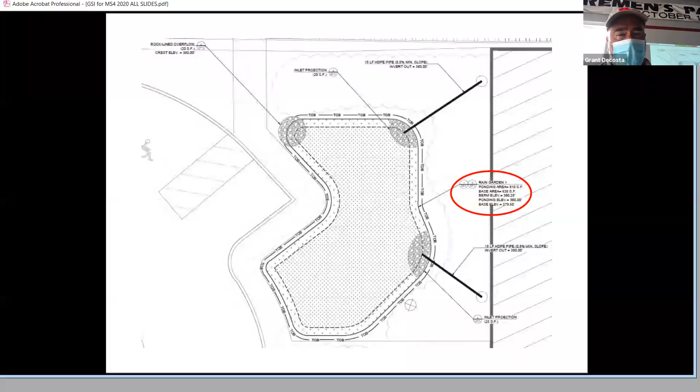You can see the red circle there, I blew that up so you can see it. It tells you how deep the garden is. The base elevation is 379.5 feet. We actually did real elevations here.

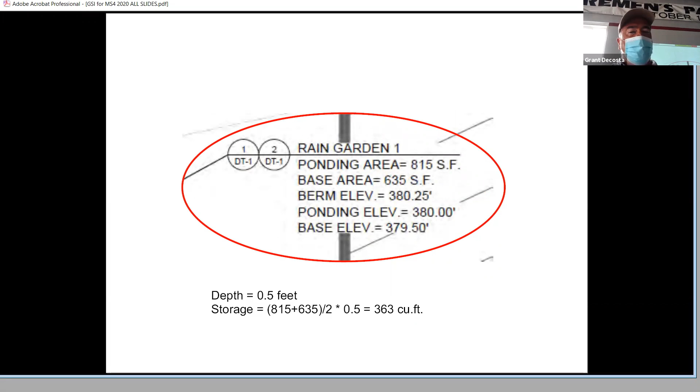The rain garden is 1/2 foot deep, and the top of the berm is another 1/4 foot above that. So the base of the garden is 635 square feet, and the top of the garden is 815 square feet. You don't want to make it like a box, it has to have a gentle slope on the side, so as you're going up, getting deeper, the garden's footprint gets bigger.

Here's how much water this garden will manage. The storm was designed for the 2-year storm, since about 95% of our rainfall comes in storms less than that. So the garden is going to capture and manage about 98,000 gallons of stormwater a year.

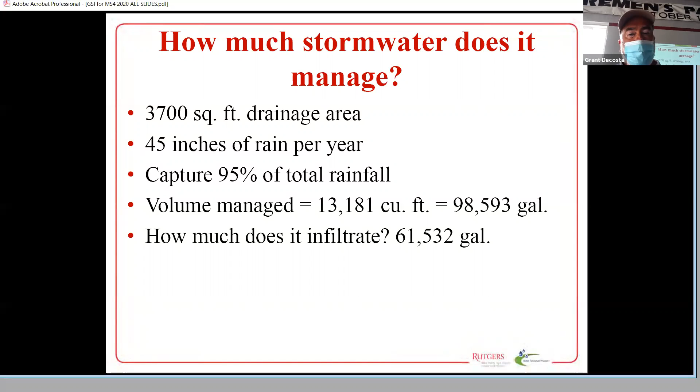But because we have an underdrain system in it, not all that water is going to infiltrate, only a portion. We modeled it and showed that about 2/3 of that is going to infiltrate, about 61,000 gallons, into the ground.

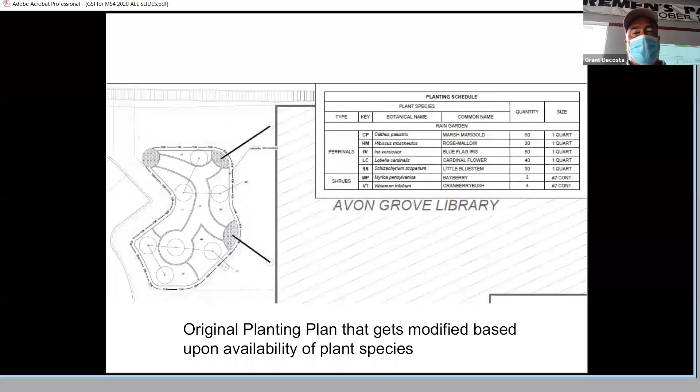The planting plan is interesting. We come up with a really cool planting plan, and then we call the nursery, and they don't have any of those plants, so we change out our planting plan. It's an iterative process, but we have an idea of what we're going to do going into it. Before we do this, we do the one call, and that's very important.

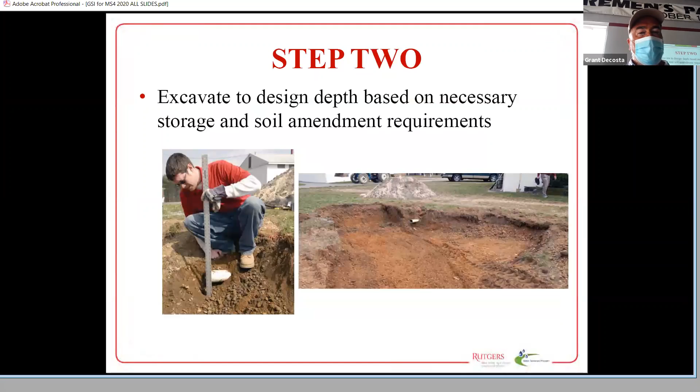Then here's the steps for the rain garden, real quickly: we mark it out with white paint, we dig out the grass, make sure it's at the right depth, and we add the underdrain system.

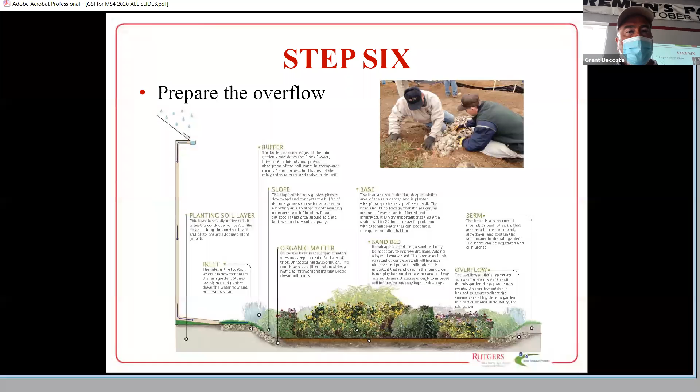We amend the soil, adding soil amendments, and rototill that in to make sure it's all encompassed. We build the berm, and make sure the overflow and inlet are set and armored so there's no erosion in those areas. We put an overflow in, like I said.

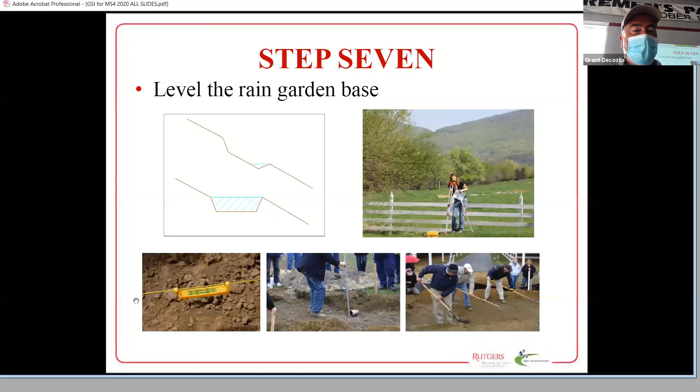Then you connect the downspouts. These are the guys here in West Grove connecting the downspouts, having, I think, a little bit too much fun.

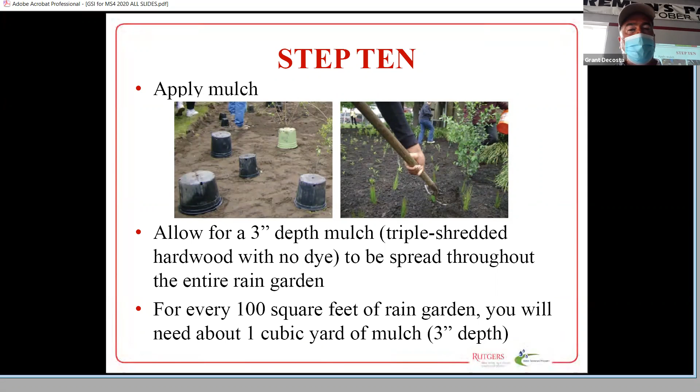Then we put the plants in the ground, and we mulch. Mulch is very important, we like to get 2 to 3 inches in there because it keeps the weeds back and it's not bad to weed. Mulch also holds the moisture, which helps with those drought periods. And then we water the first year to make sure the plants get established.